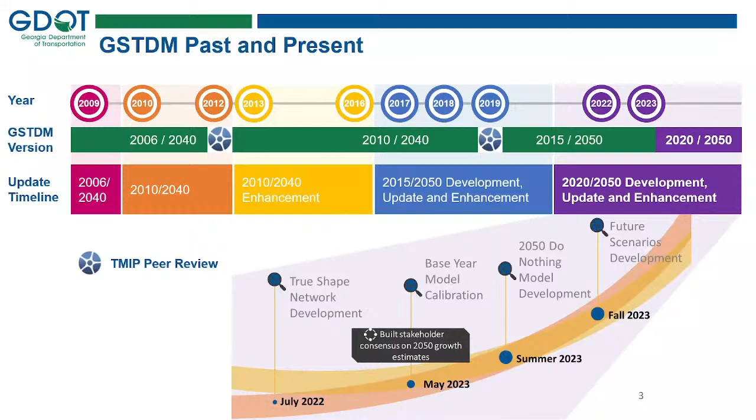This time around, we started a new process. When the model was first developed and through the subsequent two updates, we, the consultants and GDOT, worked together internally on the update of the zonal socioeconomic data. But now we asked stakeholders from regional commissions, from Georgia Economic Development, and from district engineers.

We put together a group of people to come and tell us what their growth assumptions are. We got a lot of comments and incorporated all of those into our 2050 forecast. That was the first time we did that in the past almost a decade and a half.

That gave us a pretty good forecast and growth assumption. We're very happy the Georgia Economic Development team came in and told us what they are assuming, because it has to reflect some kind of land use or future growth. All of these Fortune 500 companies coming in has meant something to the model, so we incorporated all of that.

And now we have the final 2020-2050 statewide model, which incorporates a lot of cool stuff. Jen is going to go into a little more detail, but this is pretty much the major updates and enhancements.

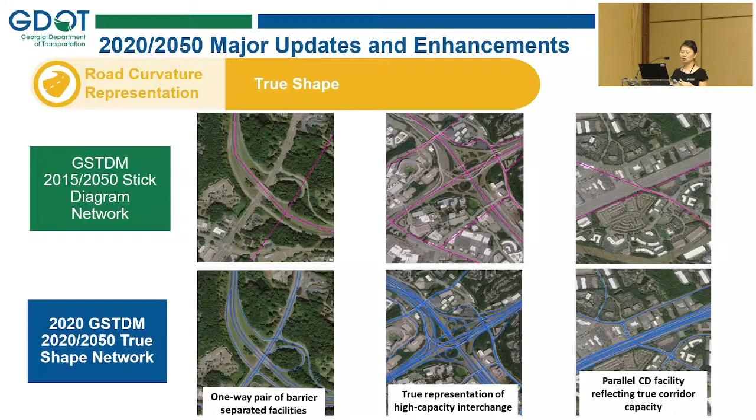The first example is the one-way pair of barrier-separated facilities. The second, in the middle, is the high capacity interchange with different ramps connecting different directions. The third is the parallel CD facilities reflecting the true corridor capacity. All of this really enhances the network accuracy for transportation network analysis.

The model network mileage is also increased, reflecting the true shape network as well as additional coverage. One thing I want to mention here is resilience planning.

As a new emphasis area from the planning side, we are trying to have a better connection of the GSTDM to some of the resiliency efforts the Office of Planning is doing. Georgia Tech has been working on a research program on transportation resiliency, and we've been in close coordination with them in two ways.

We have been providing them GSTDM outputs like projected volumes and functional classification, so they're able to use that information and incorporate it into the resiliency index. We're also going to use some of the information they've developed using shoulder data, looking at criticality as well as vulnerability, and feed that back into the GSTDM.

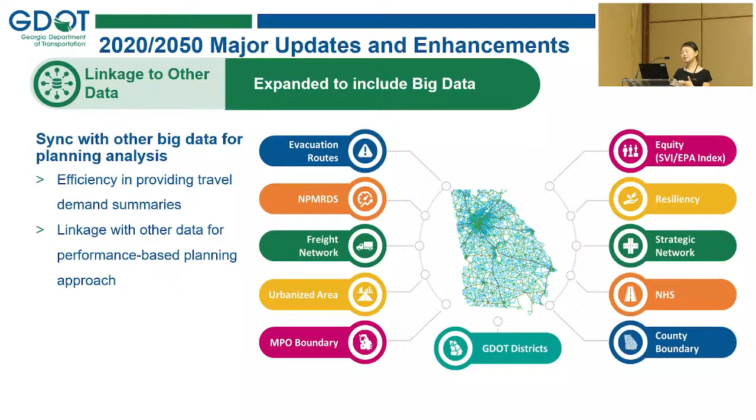The other thing I'd mention is there has been increasing coordination with GDOT districts. The Office of Planning has been sharing a lot of level of service information by district and by county, feeding into the GDOT districts. Integrating data analytics with local knowledge is super useful, and it helps us identify hotspots, hot segments, and facilitate discussion for scoping studies and transportation analysis.

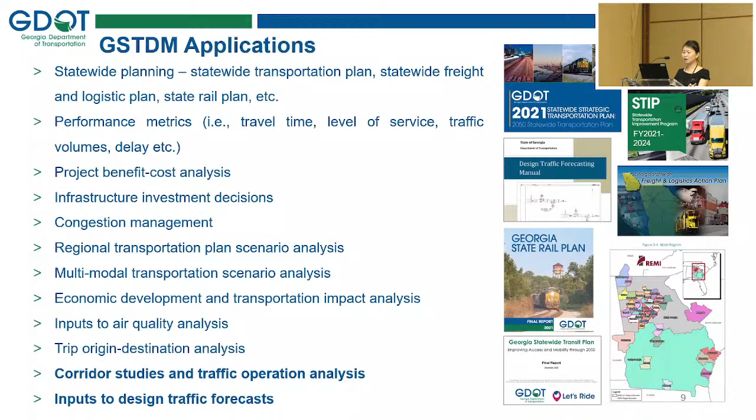Because this is the ITE seminar, I'm just going to quickly mention two kinds of applications. One is the corridor study and traffic operational analysis, and the other one is the input to the design traffic forecast.

So we have talked a lot about the GSTDM. In addition to that, GDOT is also maintaining and updating the MPO travel demand models for all MPOs with the exception of the Atlanta metro region, where ARC maintains and updates those models. So those we call the macro travel demand models. They really forecast the statewide and regional travel patterns and demand for both passenger cars and goods movements. All of those can really help support and provide inputs for project-specific analysis.

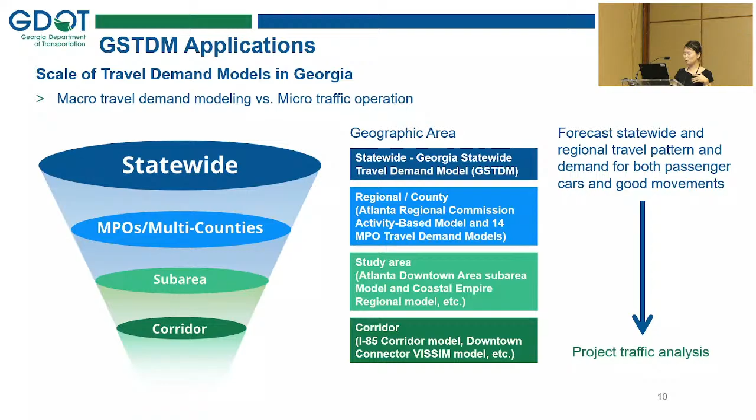So getting to the sub-area or corridor level provides a little bit more information in terms of what the growth rate is for external travel, for freight, for passenger cars, and really helps identify and support project-specific analysis.

The other one is the design traffic forecast. We have been currently coordinating with the design traffic forecasting team. It's very helpful that Habte is actually leading both sides, the technical service contract as well as the design traffic forecasting team, so we've been having conversations about how this GSTDM can help with design traffic.

One of the things we're doing right now is drafting and adding an appendix to the design traffic forecast manual with the update on the GSTDM. We're also in the process of discussing and preparing a training session for traffic engineers on design traffic forecast. The timeline is expected to have this rolled out in fall of 2024.

On the application side, we will cover how you can use the GSTDM to understand traffic pattern changes, and then how to use that for future growth rates. The project types include interchange improvements, corridor widening, as well as new construction.

You can use GSTDM outputs directly to inform some of the data, and if needed, you can also learn how to code the projects in the GSTDM and run that to understand the build and no-build analysis.

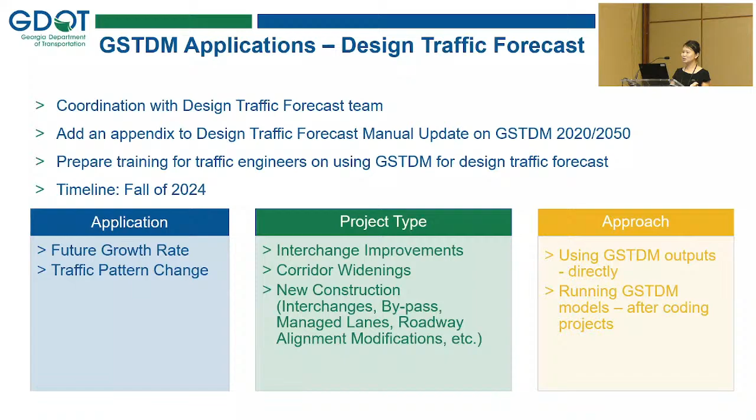So if you have any suggestions on the training or specific topics you want to learn, please send the information to us. We'll definitely consider that and make sure we include those elements when we roll out the training.

The current GSTDM specification we call GSTDM 2020-2050 version 1.0. There's a version control because we are constantly trying to figure out ways to enhance the model itself, and the 2050 shows that's really the horizon year in the future.

When you request the GSTDM, we have multiple different formats available for you. If you just need output files, we have GIS shapefile, Cube, and KMZ files. We can also provide all the input files if you need the model to run some specific information for the project.

On the scenarios, I mentioned we have a 2030 STIP as an interim year, and for 2050 we have three scenarios. We have do-nothing, which only includes capacity projects completed or under construction during 2020 to 2023. We also have existing plus committed, which includes capacity projects with construction phases included in the new STIP for fiscal year 24 to 27. And then we have 2050 STIP with basically any phases included in the current STIP.

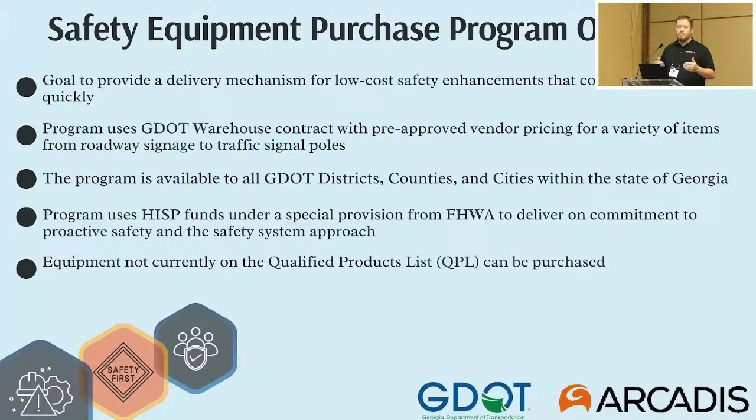The program uses GDOT's existing warehouse contracts, so items that are on their QPL can be purchased, and items not on the QPL can be purchased as well. The program is available to all GDOT districts, locals, cities, counties, and anyone looking for equipment to improve a safety need.

The program is federally funded, using HSIP funds. GDOT was able to get a special FHWA waiver to purchase equipment using federal funds. I believe it's still the only DOT in the country currently doing this—yeah, I think that's still the case.

A few things—like I said, it's meant to purchase safety equipment to be used, and also to purchase equipment for additional inventory for maintenance purposes.

The equipment purchased includes over 150 RRFBs, pedestrian hybrid beacons—and that's the full build-out, not just pieces, but buying equipment for the full PHB—LED edge-lit stop signs, FYA improvements, which I'm sure everyone here is familiar with, static signage, pedestrian heads, and warning beacons. One thing not included here is converting a new unsignalized intersection to a signalized intersection, which was also purchased using this program.

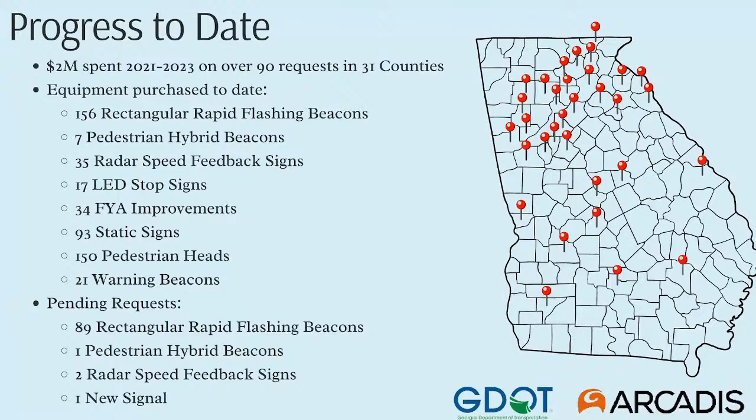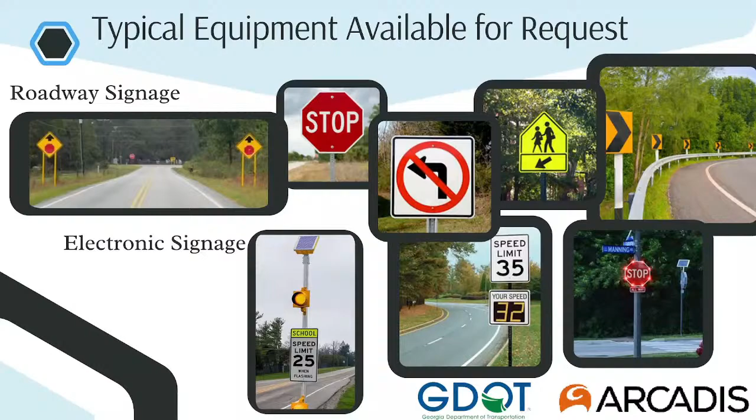Typical equipment really is everything—it could be any sort of static signage: stop signs, warning signs, no left turn signs, school signage, pedestrian signage, chevrons for sharp curves. Any static signage under the guise of safety can be purchased. Then you've got electronic signage: school flashers, warning flashers, radar feedback signs, and edge-lit stop signs, which are starting to get popular to really enhance visibility. That equipment can be purchased too.

Pedestrian equipment, like RRFBs, push button signs, PHBs, any sort of pedestrian equipment can be purchased. And then all the way to your standard traffic signal equipment - signal heads, back plates, cabinets, poles, mast arms - all of that can be procured as well. So it really does run the full list of what can be bought.

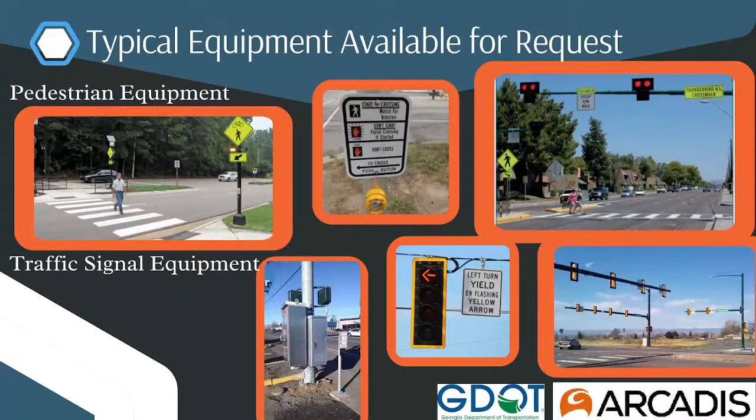The process is very linear. It's not complicated. There's no offshoots, if-then type things. There's really 7 steps as part of getting from identifying a location to getting it installed. Once the location's identified, that request gets submitted, reviewed, and once it's approved, the quote gets sent to the vendors for them to fill out their quotes and what it's going to take to purchase the equipment.

Once that quote is received, it then goes to GDOT's procurement office. They issue the PO, it goes to the vendor, they send it to the manufacturer, equipment gets shipped, whoever's requesting it picks it up, installs it, and that covers the process. So it is linear, not overly complicated. But in the next slides, I'm going to show you what's involved in each of these steps to give you an idea, and provide some transparency to this.

Identifying locations - there's really 2 main ways that locations can be identified: either a data-driven approach or a simple observed safety approach. The data-driven approach really is waiting for crashes to occur. You know you've got an issue, you can quantify the issue, but more importantly is to be able to fix some of the issues before they occur. So that gets into more of that observed response.

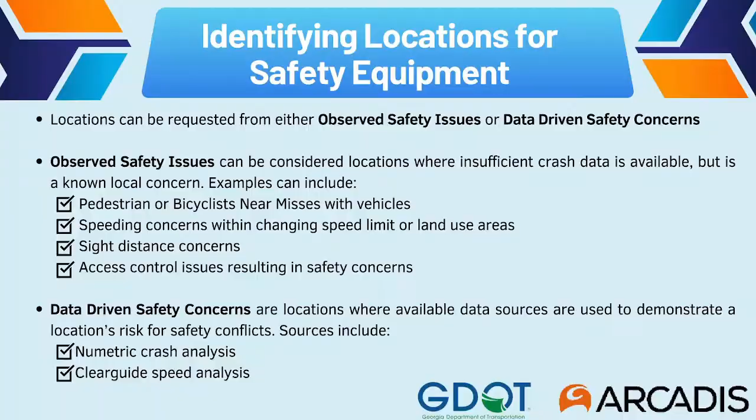When these safety equipment requests are made, there's 2 locations - either an on-system or an off-system location. Once these requests are received, if it's an on-system location, that request will be sent to whatever GDOT safety regional team is handling that area, and also coordinate with the GDOT district for that area, to make sure there's no overlapping projects or initiatives going on, and that it doesn't conflict with anything. Once the district and regional group confirm there's no issue and want to proceed, they'll email that notification back, and the paperwork will get started. Now there's a few caveats.

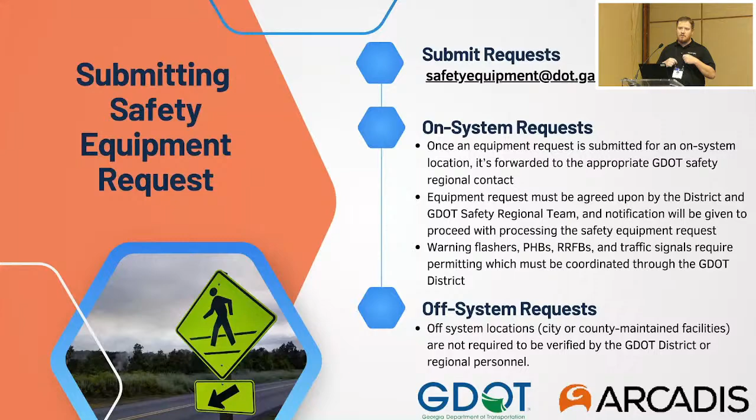If there's equipment requests that need permits - your warning flashers, your PHBs, your RRFBs on state routes, and larger modifications to traffic signals - those will need permitting. One stipulation is that permit process needs to get started before that request is officially made, with some documentation that the permit process is started. Off-system requests don't need permitting - the locals handle city, county roads. You just submit, the request gets reviewed, and the process goes ahead and gets started.

Signal permits - I'm sure most people are familiar with these. Documentation of the permit process is needed when you submit the request. For new control, documentation that the permit is approved or will be approved, going through the steps is needed. We don't necessarily want to wait until a permit is approved to prevent any lag, especially with safety improvements, so documentation that a permit is pending approval is sufficient. Then on a state route, modification to existing control, existing signal heads, RRFBs, PHBs - some more examples of that modification type permits.

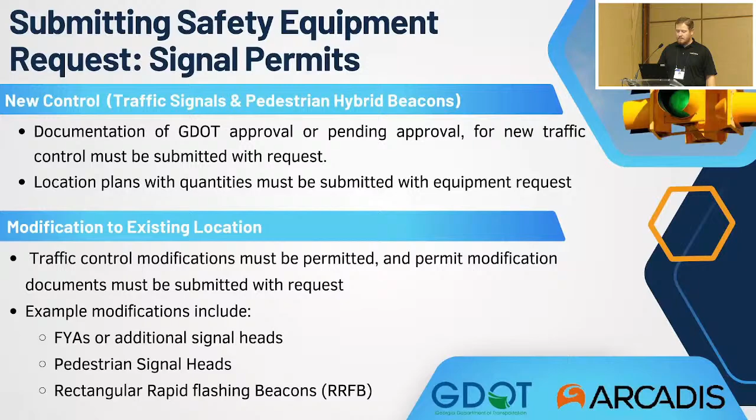The first form that gets submitted is the general guideline form. This form does not need to be submitted every time you make a request, but the end user does need to have this signed so it's on file. Basically this lays out the guidelines and expectations of whoever's going to request their equipment and install it, understanding what they're agreeing to. MUTCD guidelines need to be followed.

One of the requirements is when equipment is delivered and picked up, it's installed within 180 days of receipt, to make sure things aren't just being stored for additional supply purposes. A lot of times local agencies go to the districts and the districts submit that, and we request that the local agency actually have this form filled out so they know what they're agreeing to.

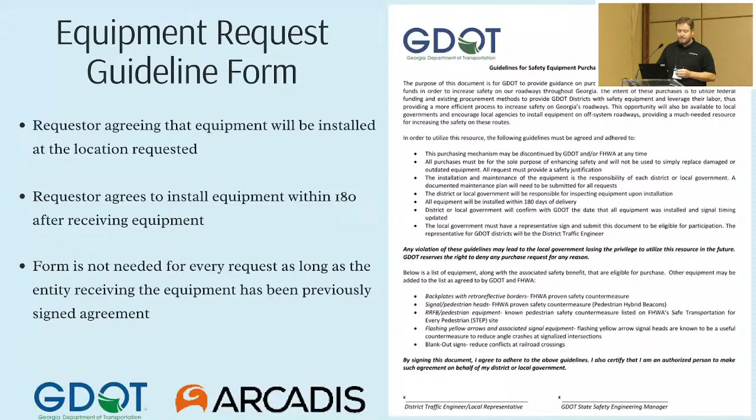Some of the issues are the equipment gets delivered, you try to reach out to the requester, but the requester is not necessarily the person that's picking it up. So then you have to go down the rabbit hole to find somebody that's going to pick this stuff up. So the request has a requester that's asking for it, but then you have a second contact of the person handling the pickup from the GDOT facility.

And then location and justification - street names, coordinates are important to make sure we know exactly where this information's going. Then some of that safety justification, like I talked about for on-system or off-system permitting, all of that needs to be included as well.

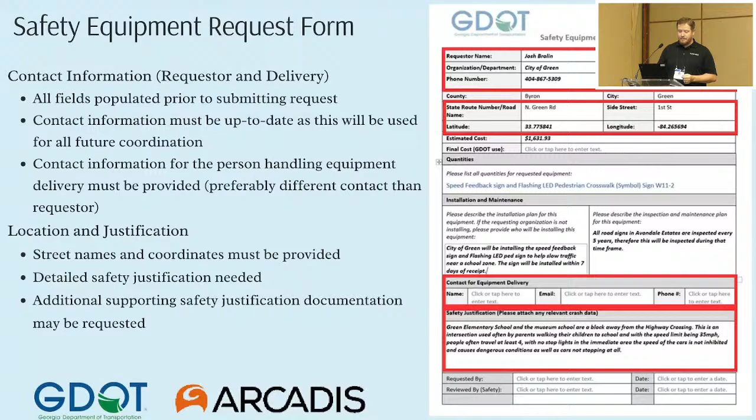Equipment quantities - we need to know how many pieces of equipment we're looking for. So if we need an RRFB for example, but you need 2 RRFB installations, one on each side of the road - if we're talking a 2-lane road, we really need that level of detail. If you've got a bigger ask, PHBs, bigger signal modifications, you've got to have the signal plan because those provide the quantities, since that's what's going to the vendor and they need to know what they're quoting and what's being asked of them.

Preferences can be accommodated - color, manufacturer, product type, all of that as well. But that's some of that additional information. If you've got product cut sheets, those can be included. All of these sorts of things can be accommodated. That's what needs to be submitted when you're asking for this stuff.

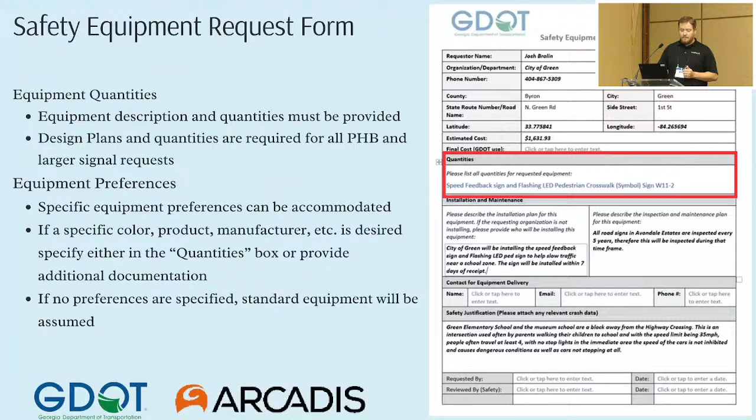One thing to mention - if preferences aren't mentioned or asked for, the standard equipment will be ordered based on the low bid GDOT warehouse contract.

Once all that's received, all this information gets put into the database and an equipment order number is generated. That number is what's used to communicate with everyone moving forward because it gives a unique ID and helps track with us, GDOT, the vendors, everyone included, where the equipment stands, where the request stands, and it creates communication that goes a lot faster. Vendor quotes - once everything's approved, it goes to the vendors.

The vendors are chosen by the low bid contract, within reason. Sometimes some vendors can ship things faster than others, so depending on how fast it's needed, we can go down the list to the next vendor that can supply it if they can provide it substantially faster. So we're not beholden to just a low bid contract, because time is a factor. And I think everyone agrees, the quicker we can move this stuff and turn it around, the better off we are.

Typically quotes are received within about a week, so they don't take too long. Obviously there's extenuating circumstances sometimes, but about 5 business days is what it takes to get quotes back. New traffic signals, PHBs, bigger requests, those take about 2 weeks because those requests are broken up amongst multiple vendors to get GDOT the best possible price. So that can be anywhere from 1 week to 2 weeks to get those quotes turned around.

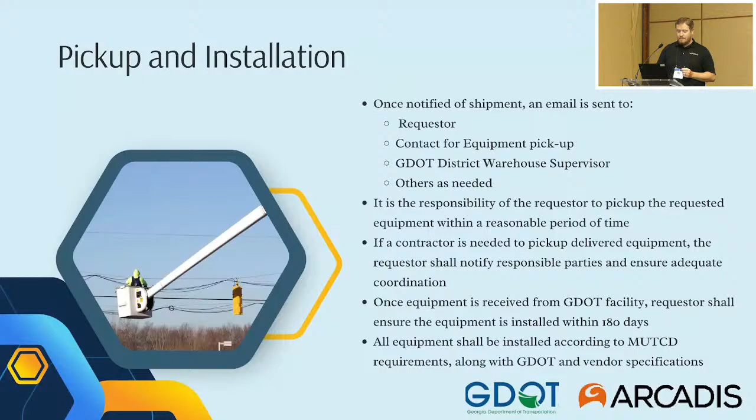So that's kind of a quick and dirty rundown. This is the same process: once the location is identified, the request is submitted, then once the request is approved is when we can start that timeline. So we're looking at about a week to get everything approved once questions are answered and everything's ironed out. Equipment quotes, 1 to 2 weeks, depending on how complicated they are.

Requisition, once the requisition is generated, goes to procurement, the PO is issued, that's about a 2-week turnaround. And then, 4 to 6 weeks for standard equipment to get shipped. So from the time everything is ironed out and there's no issues to the time the equipment shows up for standard, nothing special, you're looking at about 3.5 months. Obviously, if there's preferences like color, product type, things like that, it can delay it a little bit, but 3.5, maybe 4 months for standard items is about where things are.

So that pretty much covers it. If there's any further questions, you can either email Kelly Roberts at GDOT, or you can email myself. But thank you.

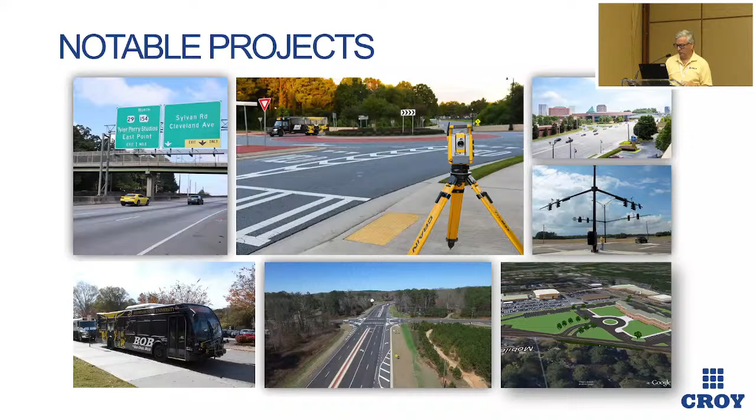The company is very interested in our employees and the community. Lunch and learns, not only on a technical aspect, but professional growth. Our involvement in the Chamber of Commerce—our CEO just rolled off as the Chamber President. And we sponsor different events like the Kennesaw 5K race. So we have a group that runs a couple times a year. That is us.

Woolsey is located in the southern part of Fayette County—Fayetteville to the north, Hampton to the east, and Peachtree City to the west. Very typical with this part of the metropolitan region, or lower metropolitan region: not real good east-west connectivity, and sometimes north-south connectivity is challenged as well. So between Hampton and Peachtree City, you have to go through the town of Woolsey. And to give you some idea, we have more folks registered with Georgia ITE than actually live in the city.

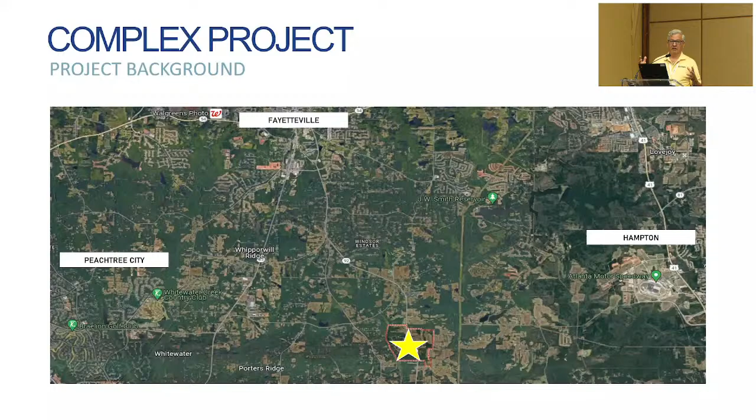In order to go east-west, Hampton Road—the east leg is south of the west leg—and you have to turn right and turn left if you're headed towards Peachtree City. In reverse, if you're headed to Hampton, you come off the west leg, turn right, and then turn left. As you can imagine, with State Route 92 being just one lane in each direction, the backups, the rear end accidents, et cetera, occur because of the configuration of the roadway and the path that has to be followed.

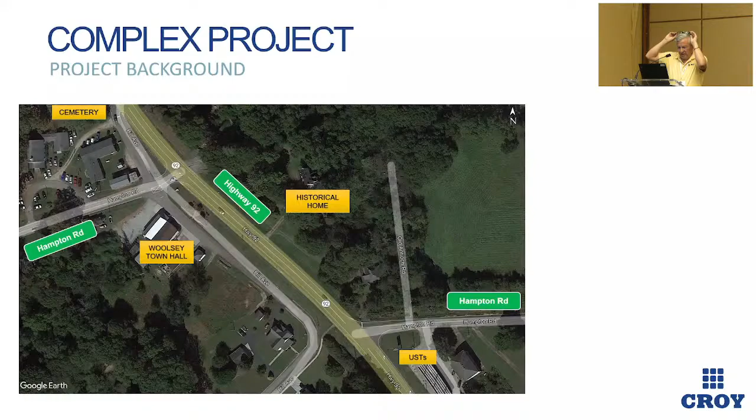So there were some constraints, and the topic—I'll reiterate a couple times in the presentation—is constraints, context-sensitive design, and consensus.

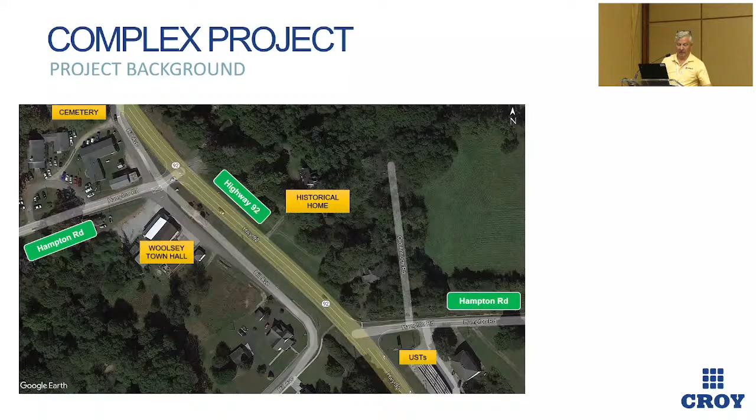So everything will go back to those 3 topics. In the bad old days, we would have taken the east leg, realigned it through the property that's the historic home, and created a 4-leg intersection to take the multiple turns out. But the constraint was, A, the historic home on that property, B, the cost of the right-of-way to do that realignment, and the impact to their downtown area, where Town Hall and the small commercial area are in the northwest corner.

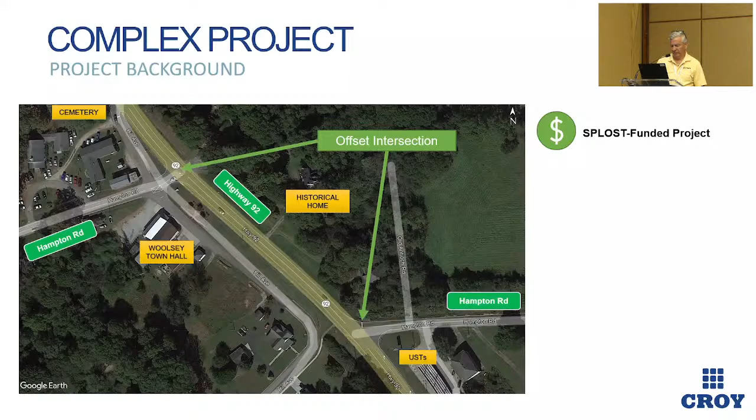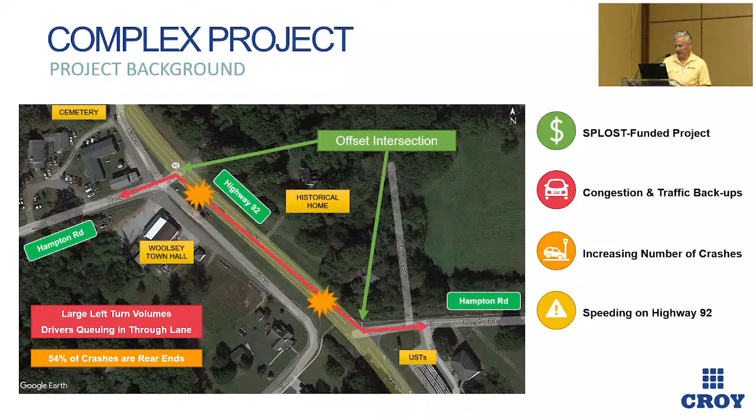There's our offset. How we got assigned the project was we were the on-call firm for Fayette County's SPLOST-funded projects. As I mentioned, the left turn volumes queued, creating backups on 92 with congestion and a significant number of rear-end crashes. During peak hours it's very slow. Off-peak, 92 experiences higher speeds than the posted speed limit. So a lot of challenges and constraints we had to deal with.

So we wanted to come up with a design keeping the east and west legs of Hampton Road where they were, and go through several iterations to see what would be beneficial from a traffic operations and safety standpoint, an enhancement to the city. The last thing we wanted to do was have folks just driving through have a negative impact on the charm, the specialness, the uniqueness that Woolsey is.

So our first attempt was, let's widen and do left turn lanes. As you can imagine, because of the through maneuvers on 92, that did not have the operational improvement. We still had, when we did the simulation analysis, traffic backing up into the through lane.

So instead of just stop control, we looked at signalizing the intersection with the west leg of Hampton Road, right there in the downtown area. And that created some issues with backups as well, in addition to impacts to the access to the development and the buildings close to the intersection.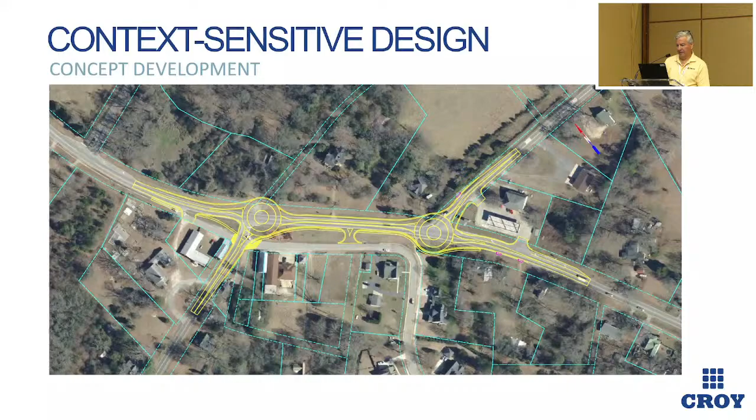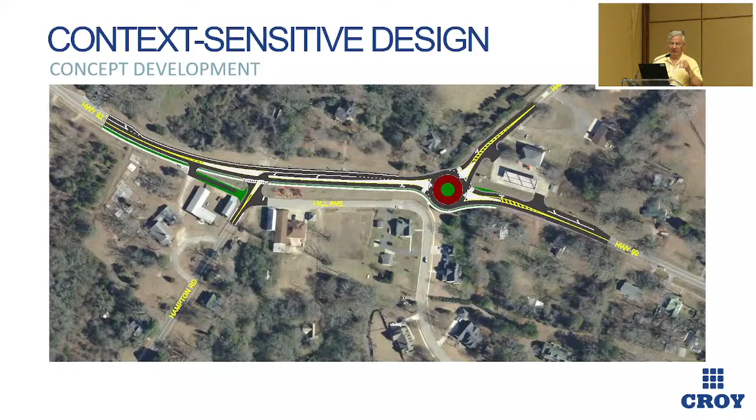So going through the iterations, we looked at an R-cut for the western leg, primarily because the eastbound left turns were pretty low. People weren't coming along Hampton Road to head north towards Fayetteville - they were getting their other routes before they got to 92. So the rerouting, if you did want to go north, was about 7 cars in the PM peak. The extra travel to go south through the roundabout and come back north is under a quarter of a mile - a minimal rerouting with significant benefits to be gained with the R-cut at the western leg.

So everything you know these days revolves around the ICE analysis. In fact, I got a tattoo that says ICE.

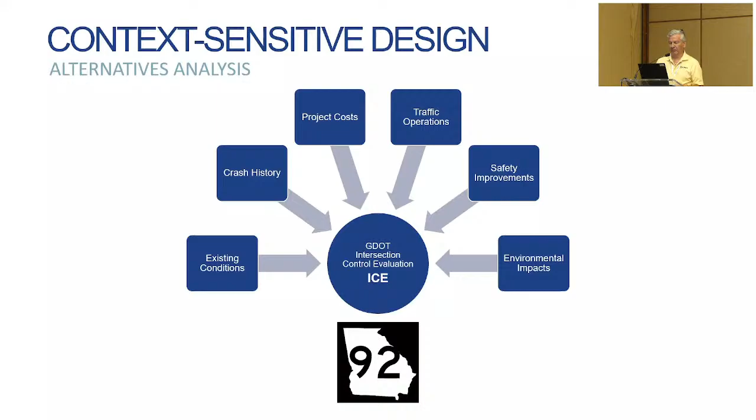So from there we looked at and had to balance the existing conditions, environmental impacts, operations, costs, and safety improvements to come up with the preferred alternative - which the construction documents are being produced for now - a signalized R-cut at the west leg, roundabout at the east leg, with a bypass lane for traffic to continue south on 92.

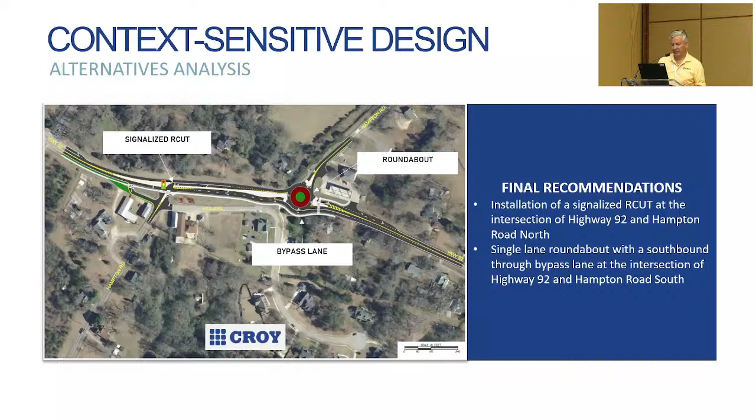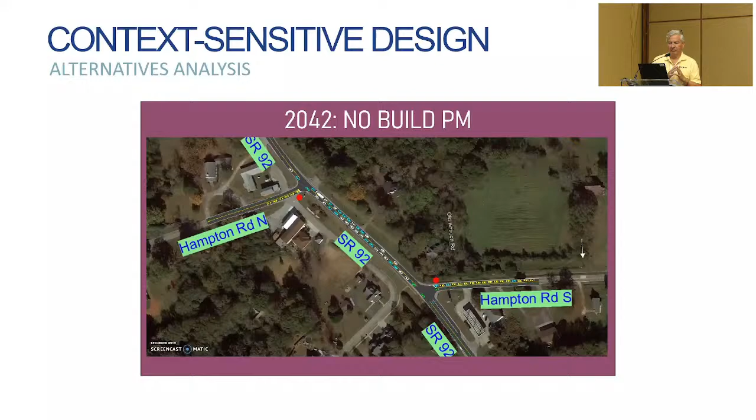So here's the 2042 no-build simulation. You can see, without getting those left turns out of the through lanes, how things back up, not only on 92 but on that east leg of Hampton Road. The technical term we use for this type of operation is yikes.

And here's the 2042 build with the roundabout and the signalized R-cut. As you can imagine, we have the overlap phase with the northbound left turns from 92 continuing to the west to get that right turn for Hampton Road heading south. In off-peak hours, the signal would be on flashing yellow arrow to minimize delay, especially when the opposing traffic is not as significant. So you can see the operational improvement we achieve, keeping the east and west legs where they are, with the R-cut and the roundabout.

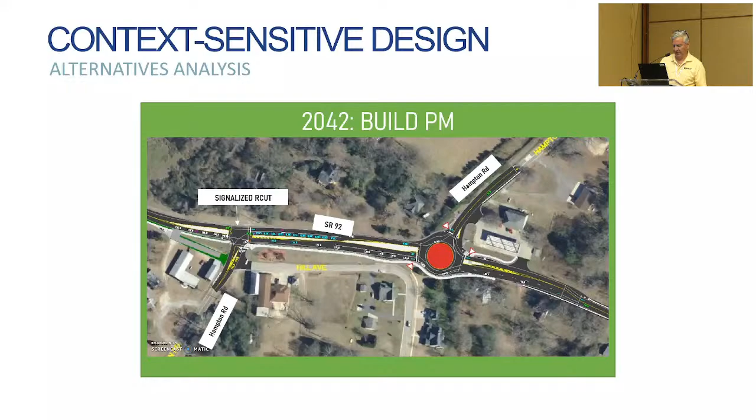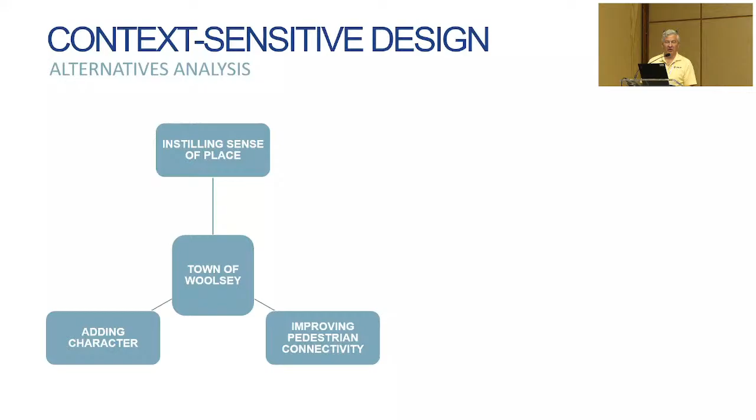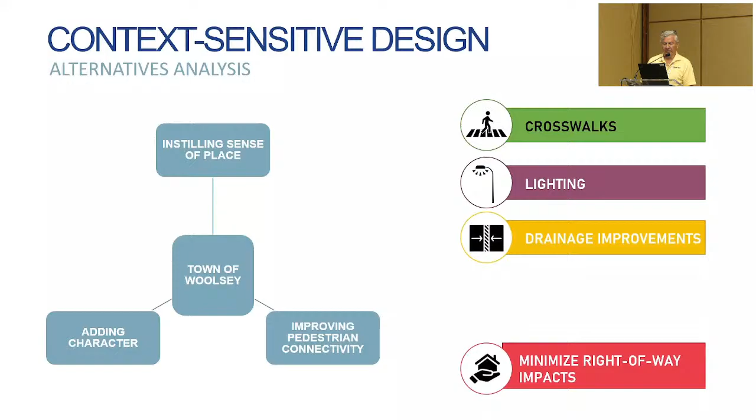So again, we wanted to be very respectful of the town of Woolsey. Folks are very proud to live there, so we wanted to enhance the character of the area, ensure that people had the option to walk and not still have to drive everywhere, and instill that sense of place while adding lighting, drainage improvements, and minimizing the right-of-way impact. It was a real balancing act to come up with the final recommendation.

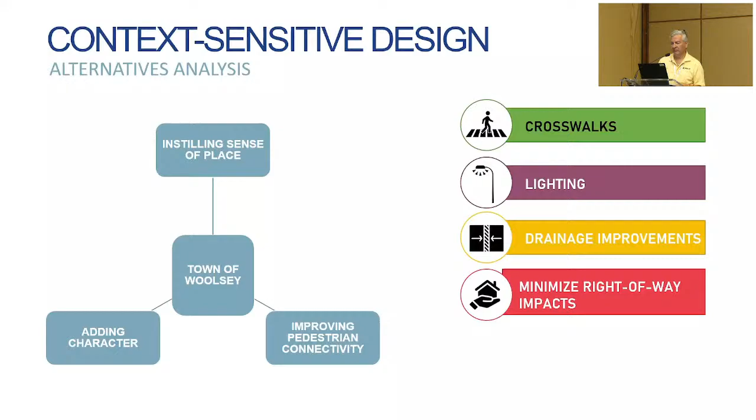The coordination, as you can imagine, on State Route 92, we worked very closely with the district office. The town of Woolsey was very involved again—people are proud to live there, and they wanted the roadway improvements not to be a detriment. And Fayette County, as the steward of the SPLOST money, making sure their goals and objectives were met as well.

With this coordination, we headed towards consensus. One of the interesting things we did was for the project website, we did a voiceover and video, which was pretty cool. I would recommend that engineers not do that—let the professionals do that. It was a good attempt, but we weren't quite there.

So what can I share with you about the lessons learned when you have a project with significant challenges and constraints while wanting to build up and enhance the community: engaging the stakeholders, identifying who the main players were, getting them involved early, and keeping them in the loop as things progressed.

Everybody's perspective is worthy, so acknowledging and addressing all perspectives was important for us. And again, it was a balancing act—10 or 12 things were happening at the same time, where we wanted to try to maximize the benefit achieved through the project.